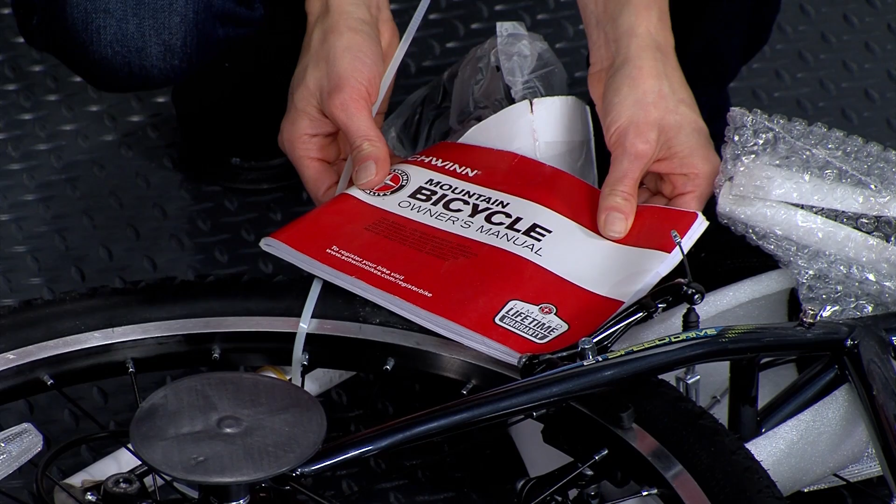Locate the owner's manual that came with the bike and review the contents. It has helpful illustrations and tips that can supplement this video guide. Then assemble the tools that will be needed to complete the project. For this, you'll need a cutter, pliers, wrenches, and screwdrivers.

This video is part of a series, each focused on a specific part of the bike to be assembled. Make sure you watch each one and take your time as you put your bike together to ensure that it is assembled properly and safely. Enjoy the ride!

You'll need a 6mm hex wrench to complete this step. Make sure the fork is facing forward. Loosen the stem binder bolt and insert the wedge-shaped part at the bottom of the stem far enough into the steer tube that the minimum insertion mark can't be seen.

Tighten the stem binder bolt, keeping the handlebars aligned with the front fork. Adjust the height as needed for alignment, rider fit, and comfort.

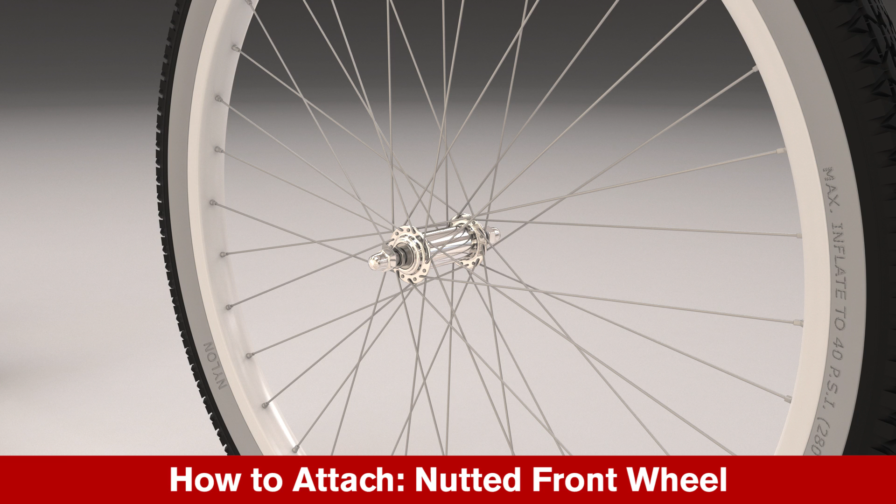You'll need a wrench to complete this step. Loosen the wheel axle nuts enough for the fork ends to fit. Seat the axle completely in the dropout slots with the washers on the outside. If the washers have hooks or steps, place them inside the small holes on the fork dropouts.

Center the wheel and tighten each axle nut gradually and evenly by switching sides until both are secure. If the wheel is not centered, loosen the axle nut on the side with the smaller gap. Shift and hold the wheel on center and re-tighten the nut.

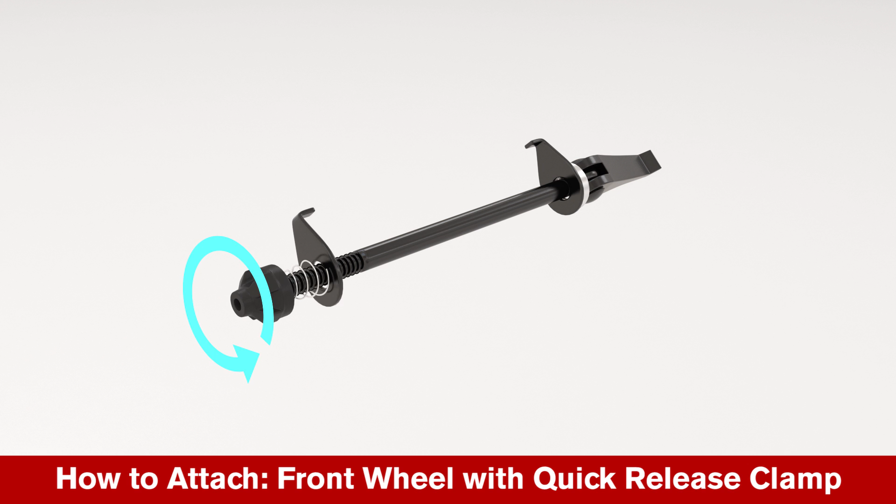Some tread patterns are directional and need to face a certain way. Make certain the front wheel is oriented correctly. Locate the quick release skewer and remove the adjustment nut and outer spring and washer. With the quick release lever on the opposite side of the chain, slide the skewer through the front wheel axle.

Replace the outer spring with its smaller end toward the wheel and loosely thread the adjusting nut onto the skewer. Seat the axle completely in the fork dropout slots, keeping the wheel as centered as possible. Hold the quick release lever in an open position and hand tighten the adjusting nut until some resistance is felt.

The correct tension is achieved when the lever requires a firm hand to close but is not forced. With the handle closed, spin the wheel to be certain that it's centered and properly seated.

You'll need a 14mm wrench to complete this step. Apply grease to the outside of the seat post. Loosen the seat clamp bolt and insert the seat post far enough into the seat tube that the minimum insertion mark can't be seen.

Align the seat with the top tube of the frame and tighten the bolt until the clamp holds the seat post firmly in position. Adjust the seat height as needed for alignment, rider fit, and comfort.

You'll need a 5mm hex wrench to complete this step. Apply grease to the outside of the seat post. Unlock the quick release lever and insert the seat post far enough into the seat tube that the minimum insertion

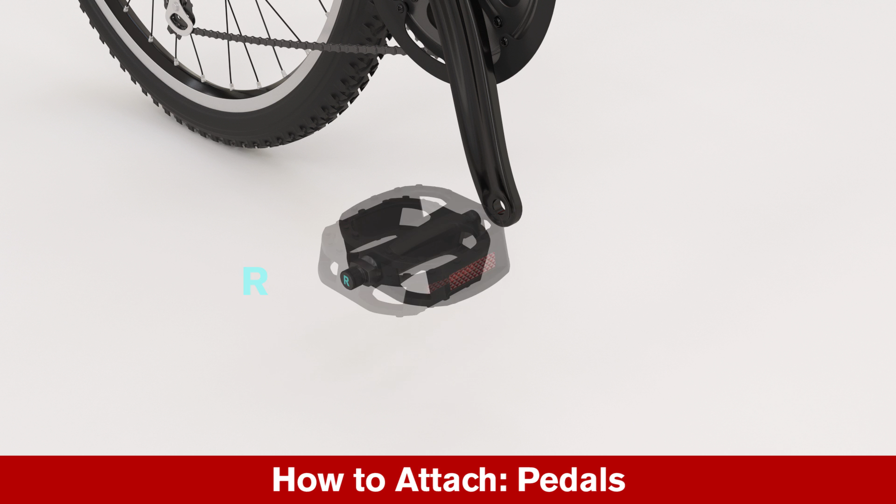Pedals are directional and conveniently marked with an R for right and L for left. The R pedal should be matched to the right-hand crank arm on the chain side of the bike and is threaded in a clockwise direction, while the L pedal should be matched to the left side crank arm and is threaded in a counterclockwise direction.

Start threading each pedal by hand in the correct direction on the appropriate crank arm. Then wrench tighten.

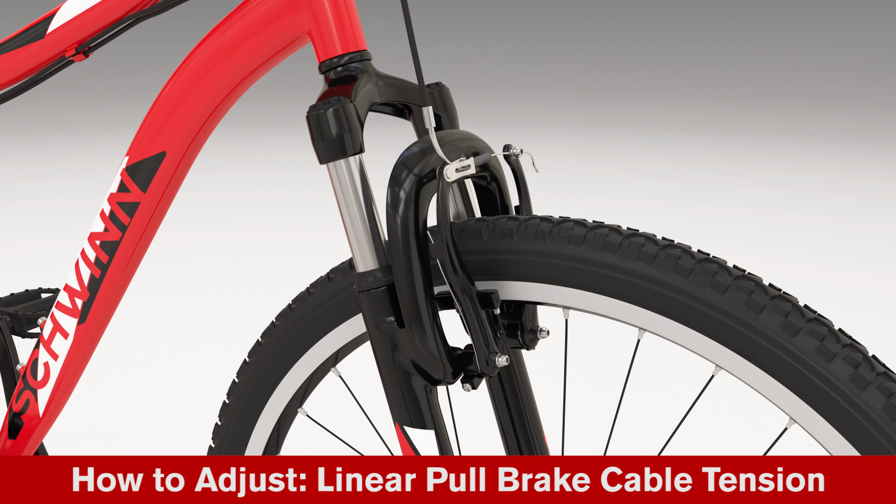You'll need a 5mm hex wrench to complete this step. Check the brake cable is seated in the brake lever. Squeeze the brake arms together with one hand until the pads touch the rim. With the other hand, pull the cable and insert the end of the noodle into the carrier.

Loosen the cable anchor bolt so the cable moves freely. Pull the cable through the anchor until the left brake arm sits about 1/8 of an inch from the rim. While still holding the cable, move the right brake arm until it reaches the same distance from the rim and tighten the cable anchor bolt completely.

Check the brakes are centered to the wheel. If the gaps between the pads and the rim are not the same on both sides, loosen the anchor bolt and adjust until even.

You'll need a Phillips head screwdriver to complete this step. Look at the brakes over the tire to see if they are centered. If the gaps between the brake pads and the wheel are not even on both sides, this will need to be adjusted. Make sure the wheel is centered.

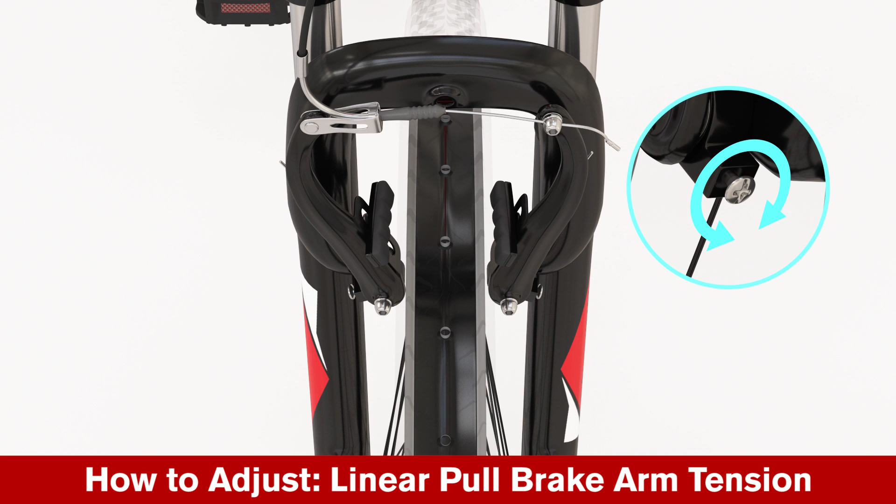Squeeze the brake levers to test operation, then start with the arm closest to the rim or the arm that is moving improperly. In small increments of 1/4 to 1/2 turns, rotate the brake arm screws in the appropriate direction to move them in or out. Clockwise rotation moves the pad away from the rim, while counterclockwise moves the pad closer.

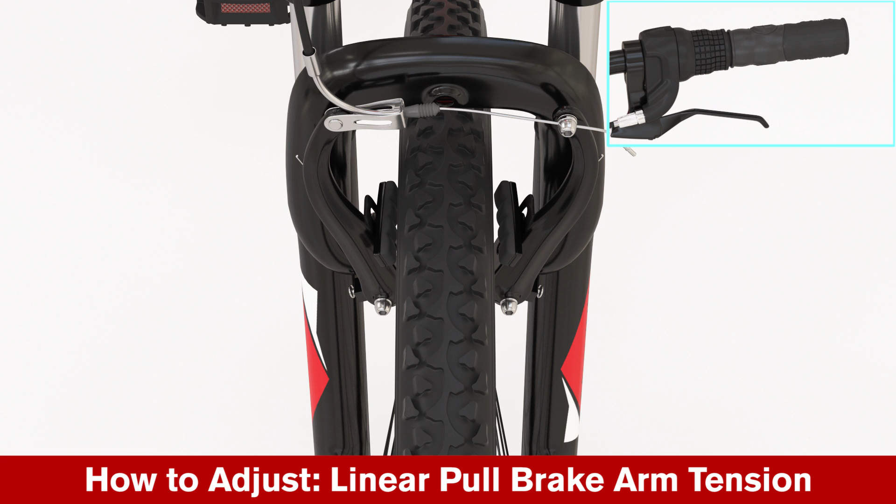When the pads are at a 1/8 inch gap on both sides, check the centering by squeezing the brakes. If the brake arms don't move evenly, they may need to be fine-tuned through a series of adjustments.

You'll need a 10mm wrench to complete this step. Caliper brakes should be centered to the wheel. If one of the caliper arms moves more than the other, or not at all, the brakes can't operate properly. To adjust, first check that the wheel is centered. Then compare the gaps between the wheel and fork, and the pads and rim.

To center the brake, loosen the caliper mounting lock nut and position the brake so both arms move equally. Squeeze the brake lever to hold the caliper closed while tightening the nut. Release the lever and recheck. Repeat the adjustment if it shifts out of place.

You'll need a 9mm wrench to complete this step. Loosen the cable anchor bolt so the wire slides freely. Squeeze the caliper arms with one hand so the pads touch the rim, and with the other hand, pull the cable tight through the anchor bolt. Hand tighten the anchor bolt and then wrench tighten. Use the adjustment barrels to fine-tune the brake cable tension.

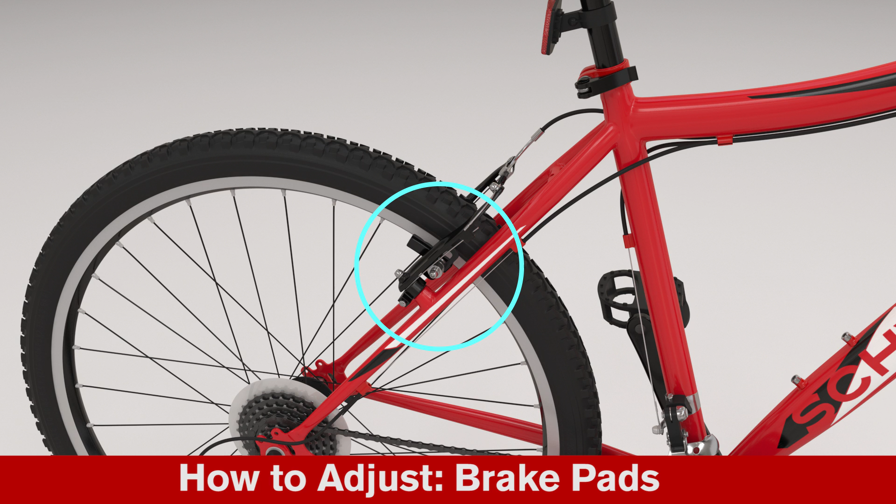You will need a 5mm hex wrench to complete this step. Brake pads should be evenly centered on the rim. To adjust, loosen the bolt and reposition the pad. Re-tighten the bolt.

You'll need 2.5 and 5mm Allen wrenches to complete this step. Rotate the wheel and look at the gap between the rim and fork. If the gap is uneven, loosen the axle nuts and adjust until the wheel and disc rotor are centered.

Loosen the two centering adjustment screws and adjust the caliper body until the gap between the disc rotor and the brake pads is approximately 1/32 of an inch on each side. Using a 1/32 inch spacer gauge between the outside brake pad and the disc rotor, and while slightly pushing the brake caliper towards the wheel, tighten the centering screws.

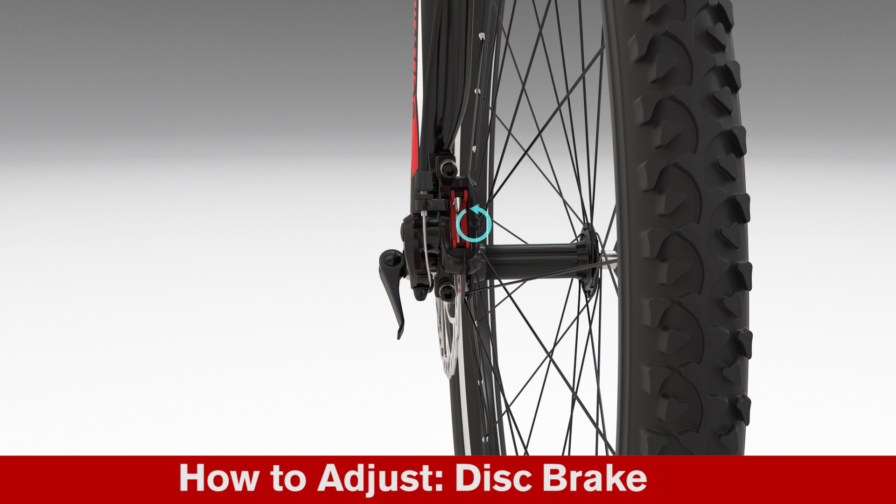With a 1/32 inch spacer gauge between the disc rotor and the brake pad, loosen the set screw. Turn the brake pad adjustment screw clockwise to move the pad toward the disc rotor and counterclockwise to move the pad away from the disc rotor.

Adjust the pad until the gap between the disc rotor and the brake pads is 1/32 inch on each side. Re-tighten the set screw. If the brake cable wire is not attached to the brake arm, then loosen the cable anchor bolt until you can see a gap large enough for the brake cable wire. Pull on the brake cable wire and place it under the cable anchor bolt. Tighten the cable anchor bolt.

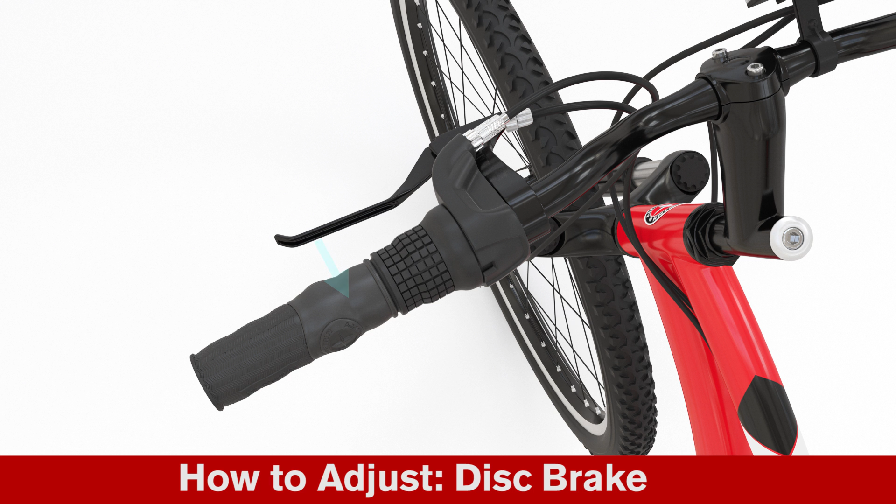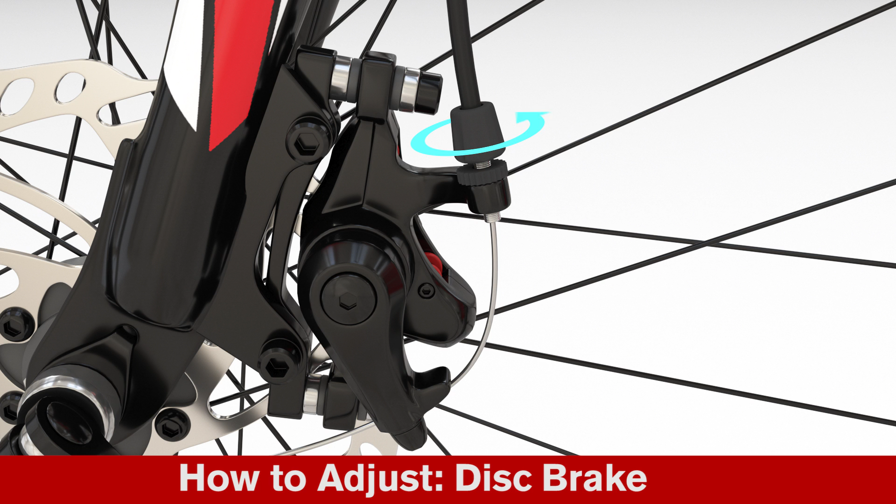Check that the brake cable tension allows the lever to travel about 1/3 of the distance to the handlebar before the brake pads contact the disc rotor. If the cable has stretched or slipped, you'll need to make some adjustments. Slightly loosen the jam nut. Turn the adjustment barrel clockwise to loosen the brake cable tension, or counterclockwise to tighten. Re-check the brake cable tension and tighten the jam nut. Refer to the installation guide for ways to double-check that the brake is correctly adjusted.

You'll need a hex wrench and a Phillips head screwdriver to complete this step. With the rear gear shifter set to the largest number, disconnect the rear derailleur cable from the anchor bolt and place the chain on the smallest sprocket. Adjust the high limit screw so the guide pulley and the chain are vertically lined up with the smallest sprocket. Pull the cable taut, reconnect it, and tighten the cable anchor bolt.

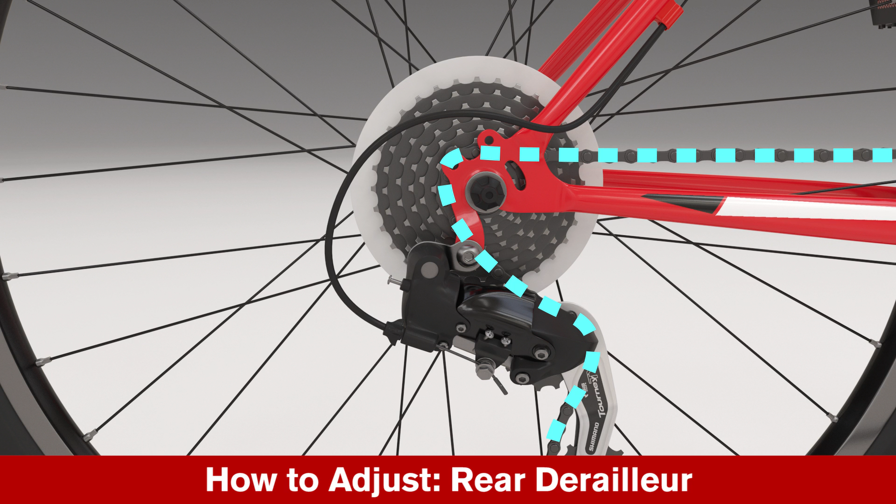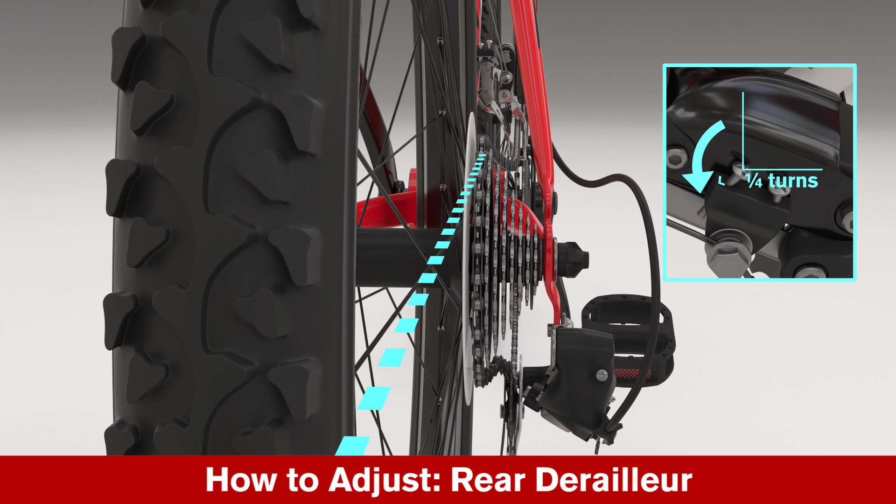Now, with the rear shifter set to gear 1, place the chain on the largest sprocket and adjust the low limit screw in quarter-turn increments until the guide pulley and chain are vertically lined up with the largest sprocket. If it's difficult getting the chain on the largest sprocket, turn the low limit screw counterclockwise to move the chain closer to the wheel.

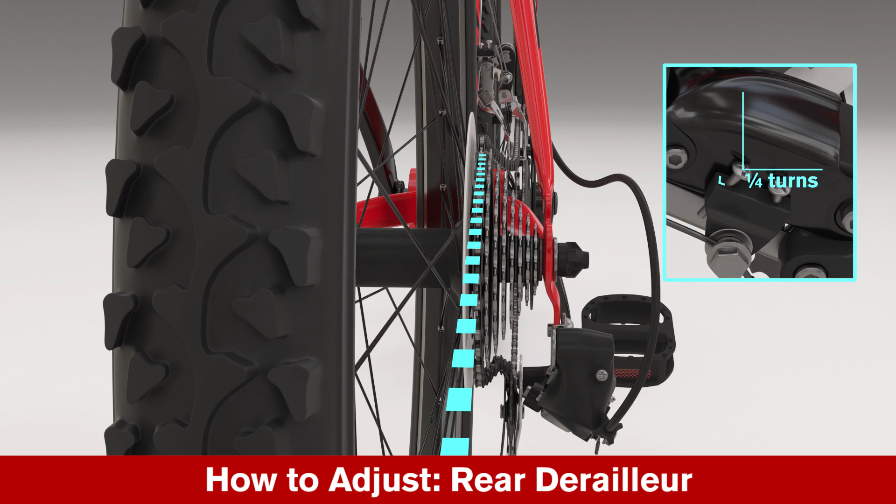To test, shift through the gears, making sure each gear is achieved quietly and without hesitation. If there are issues, fine-tune the cable tension by rotating the barrel adjuster in the appropriate direction to move the derailleur cage closer to or away from the bicycle. Fine-tuning may take a series of adjustments. On some models, adjustments can also be made at the right side or rear shifter.

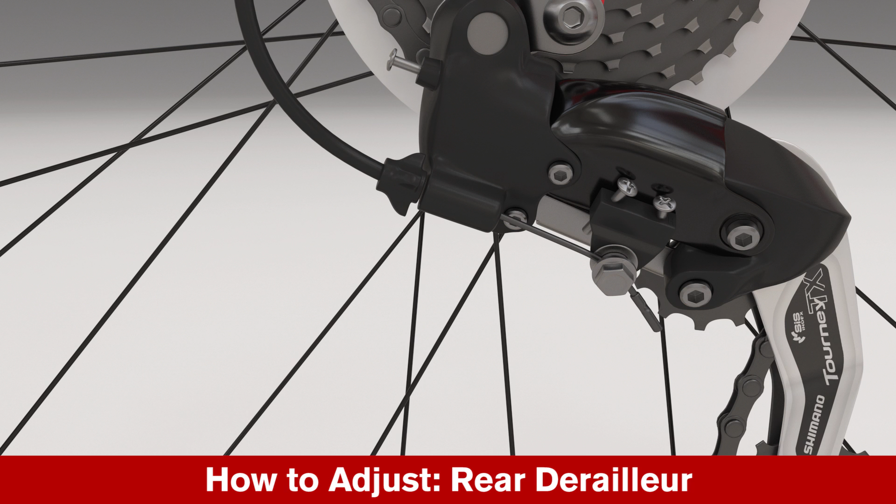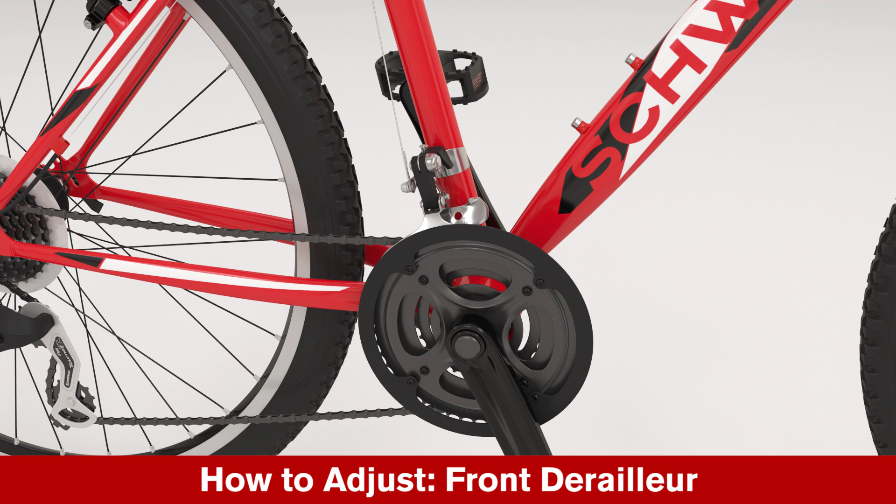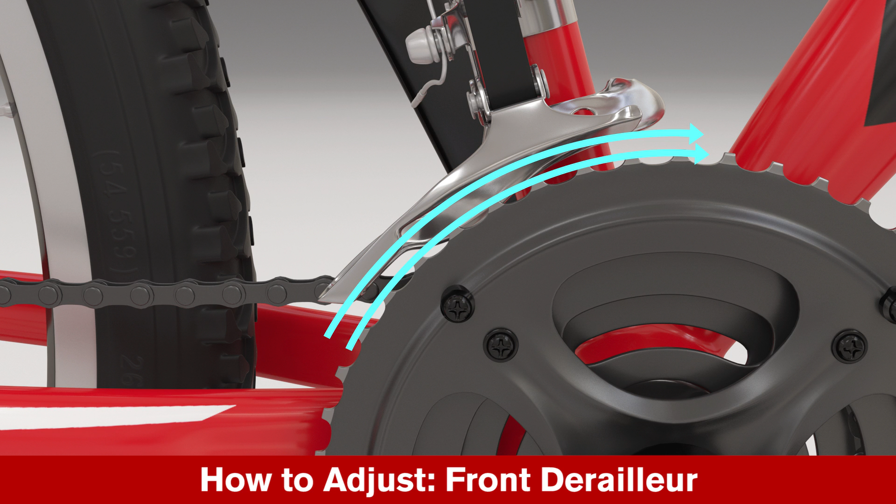You'll need a wrench and Phillips head screwdriver to complete this step. With both shifters set to the smallest number, disconnect the cable from the anchor bolt and place the chain on the corresponding sprocket and chain wheel. The position of the front derailleur should be parallel with the largest chain wheel, and the chain guide should clear the chain wheel by 1 to 3 millimeters. Adjust the low limit screw so the chain is approximately centered in the front derailleur cage. Pull the cable taut, reconnect it, and tighten the cable anchor bolt.

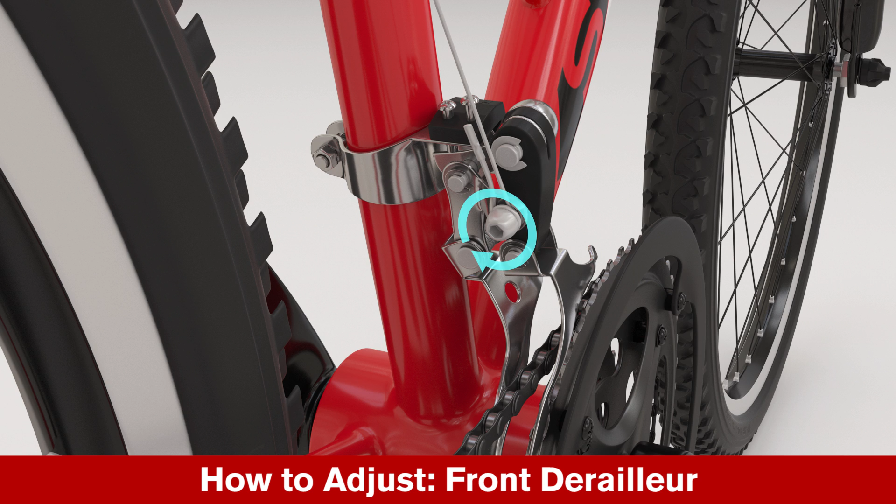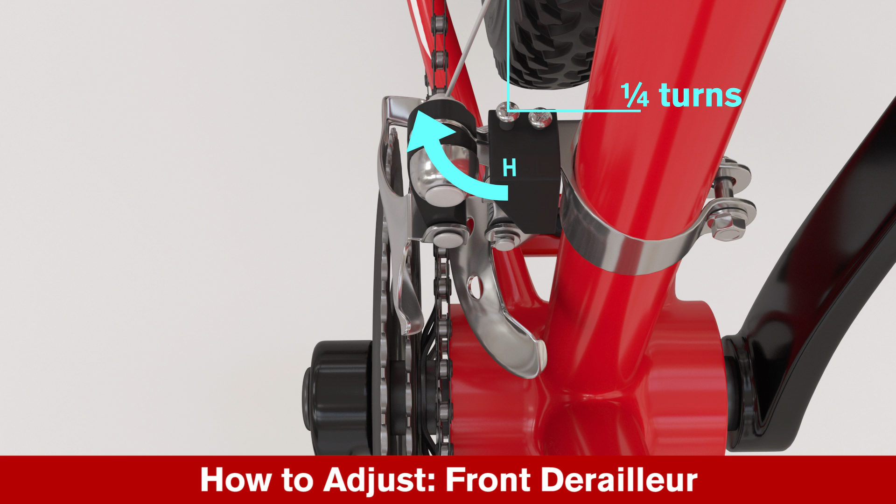Now, set the front shifter to the highest number and move the chain to the largest chain wheel. If the chain doesn't go onto the largest chain wheel, turn the high limit screw counterclockwise in 1/4 turn increments until the chain engages. If the chain falls off, turn the high limit screw clockwise in 1/4 turn increments until the chain no longer falls off. To test, shift through the gears, making sure each gear is achieved quietly and without hesitation. Fine-tuning may take a series of adjustments.

You'll need a hex wrench to complete this step. Loosen the handlebar binder bolts and center the handlebar to the bike. Make sure the brake and shift cable are routed properly around the handlebar so they're taking the smoothest path across the bike with no snags or twists. Alternate tightening the bolts a little at a time, keeping the gap between the stem cap and the stem even until the handlebar is firmly secured.

Identify the correct tire pressure as indicated on the tire sidewall. Remove the valve cap and secure the pump to the stem. Inflate to the correct tire pressure. Securely replace the valve cap.

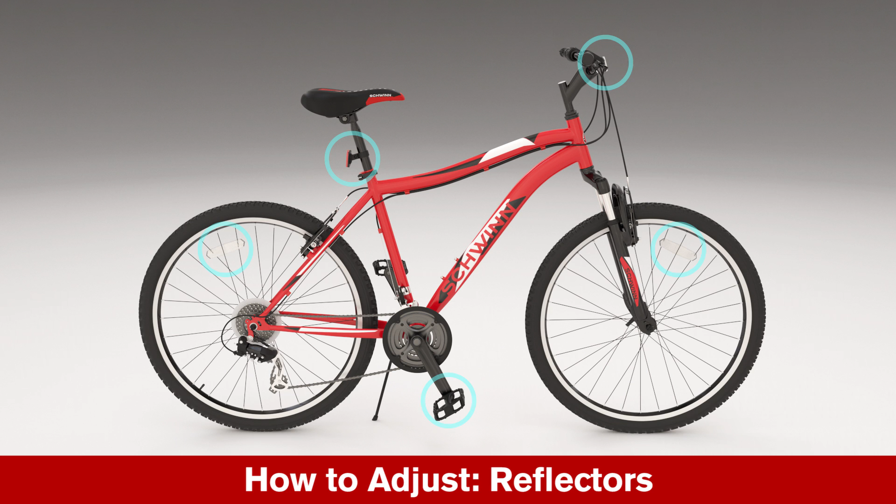You'll need a Phillips head screwdriver to complete this step. Check and confirm the front and rear reflectors are installed correctly, facing either directly forward or backward and perpendicular to the road surface. The front white reflector should be mounted on the handlebar, and the rear red reflector mounted to the seat post.